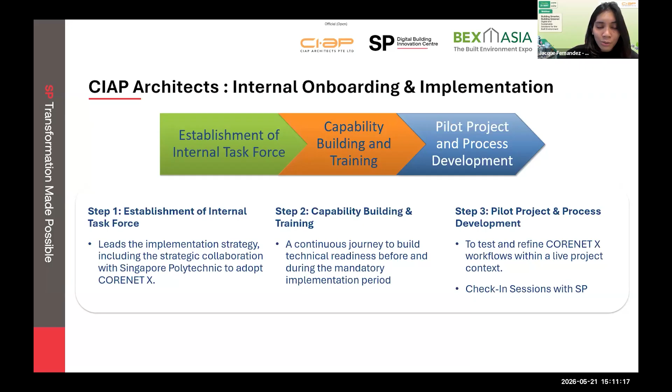We continue to work closely with SP throughout stage 1 to 3, and I'll be sharing more about this in the next slide. Together with SP, our first step was to understand the start-to-end project workflow under CORENET X.

So we mapped out how information flows between the architects and the technical team, as well as the authorities, and the impact CORENET X has on our project lifecycle. The alignment was crucial because collaboration is truly the key driving factor for CORENET X.

To date, CIAP has three ongoing projects under CORENET X now, each at their own milestones. One project is preparing for construction gateway. Another is preparing for design gateway, replying to our very first WD for that project. And lastly, we have one more project preparing for its first DG submission. All this occurred in the past, I would say, 8 months from the third quarter of 2025.

The second step focused on digitalization upskilling, starting with RABW training. Here we learned the new CORENET X submission requirements, clarified the roles of architects versus BIM specialists, and also practiced using submission checklists for the different gateways involved. This stage gave our staff the confidence to understand not just what to submit, but how to structure our submissions correctly at each gateway. This is one of our trainings at SP itself.

Our whole office went down to understand the RABW together.

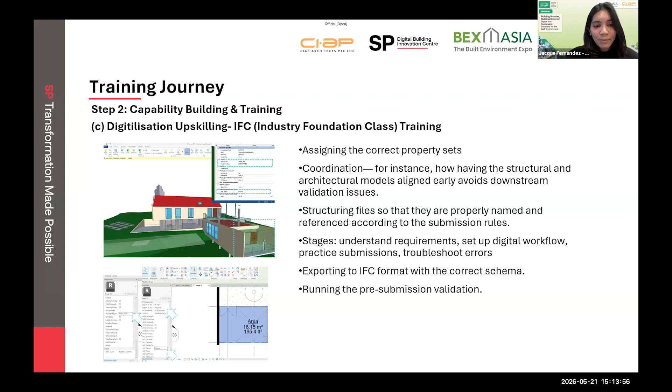Lastly, we finally applied it to a live pilot project. And from then on, that was where we truly went hands-on and developed our process. To date now, we have developed a CIAP internal CORENET X IFC SG guidebook.

This guidebook applies to all projects that require an IFC model submission under CORENET X, and it is also CIAP's internal working standard. It translates the external requirements into a practical internal workflow that we can follow consistently across projects, developed based on our training sessions in the past few months and, most importantly, our real experience from our live pilot project that has since been submitted already.

This guidebook is actually intended to cover the full end-to-end workflow from understanding the RABW all the way to submission, while ensuring IFC SG compliance. So on the screen is an example of the content page in our guidebook.

You'll see that the guidebook is structured into several key chapters. First, we start with an introduction, which explains the purpose, the scope, and how users should navigate through the guidebook, and how users have to link it back to the RABW or back to the IFC SG guidance.

Next, we move on to the IFC SG framework, where we cover fundamentals such as what is IFC, why is it required under CORENET X, and how IFC SG works in the context of submission requirements. I feel this content in the guidebook is crucial because, to an extent, everyone is also still trying to understand exactly what this IFC SG is and why it's relevant.

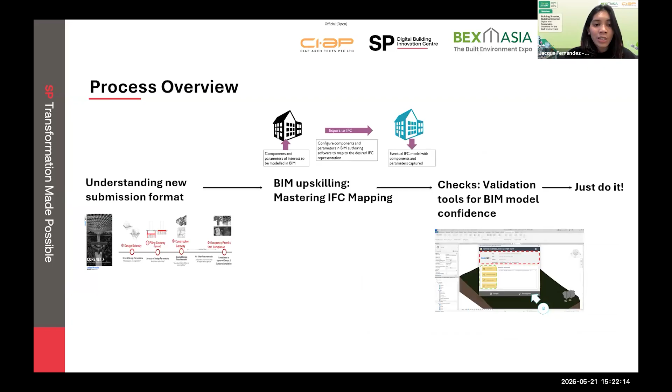Overall, the key message is that CORENET X is not just a compliance exercise. It requires a structured workflow, clear responsibilities, and strong internal standards to execute this effectively. For us, the training was more than just a learning system; it was about transforming our mindset from drawing-based submissions to data-driven submissions. The step-by-step structure of the SP program, from understanding the regulations to mastering IFC plus SG standards and then walking through the entire workflow, made the transition manageable and achievable, even for a medium firm size like ours.

Finally, I'd like to share a few reflections from CIAP's CORENET X journey. Our first key lesson is to involve the whole team from the start. CORENET X is not just a BIM or technical initiative; it affects everyone—architects, technical staff, management, and even your administrative teams. Everyone will play a role, and the transition is much smoother when the entire office understands the bigger picture and is part of the journey.

Second is to adapt digitalization progressively. The shift to CORENET X can seem overwhelming at first, but when broken down into manageable steps—understanding the new submission process, learning IFC mapping, and mastering the validation tools—it becomes much more approachable. Leverage the tools the industry is developing, and they will continue to develop these tools because we will only continue to advance from here. So what I would suggest is continue to expose yourself to all the third-party extensions that are currently being, I would say, competitively developed right now.

Lastly, set up your standards, stress test your workflows, and train your teams. By the time CORENET X becomes mandatory for all projects, you will have the systems, the knowledge, and confidence in place. Yeah, that's all. Thank you.

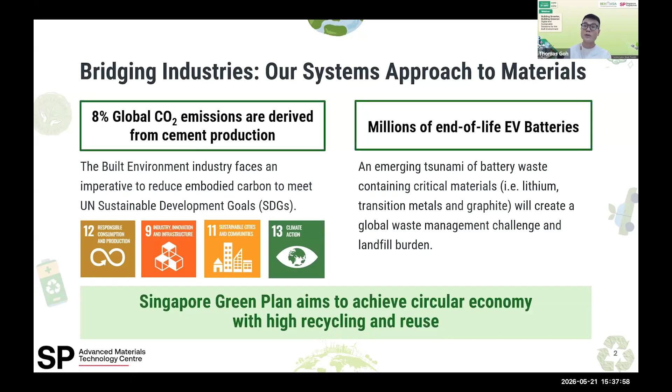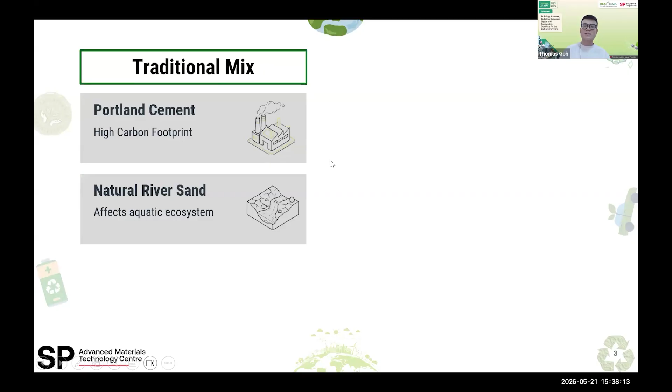So what is the innovation that SPAMTC is providing here? In traditional concrete mix, you have Portland cement, which has a high carbon footprint, as well as the use of natural river sand, which is commonly used today. For our SP sustainable mix, we are using two different types of supplementary cementitious material, which are materials that can partially replace cement.

One is GGBS, an established byproduct from steel production. Secondly is the spent graphite. Spent graphite is our main focus here because it is the innovative and upcoming waste material that will be coming in large volume in the upcoming years.

If you ask how much graphite you can obtain from the battery, depending on the battery manufacturer, the amount of graphite can account for about 12% to 21 weight percent per vehicle of the electric vehicle battery. This graphite is used in electric vehicles in the battery because of its high electrical conductivity in conducting electrons to make the battery work efficiently.

So when you actually put the spent graphite into concrete, we are expecting that this concrete can open the doors for energy efficient, smart infrastructure, as well as smart building applications.

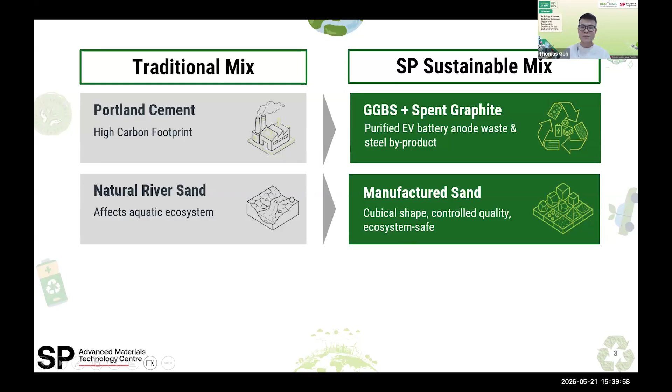Secondly, we are also partially or fully replacing river sand with manufactured sand. This manufactured sand comes from granite quarries, and because it is manufactured, you can control the size to be cubical. Because they are all more or less controlled under a tight stringent condition, this manufactured sand gives the concrete more consistent workability as well as consistency.

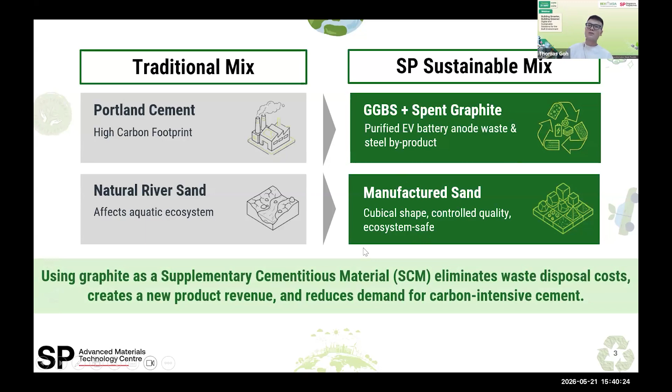So we want to promote the use of graphite as one of the SCMs to eliminate the waste disposal cost for the waste recycler. We also create new product revenue for this waste recycler and reduce the demand for carbon intensive cement. So we're killing three birds with one stone.

Under this zero waste system, how it works is that first, from the battery supplier's point of view, there will be an extensive extraction and purification of the battery. This is to decommission the battery to prevent battery explosion. They have to treat it first, fully discharging the battery, for example in a concentrated salt solution, to prevent explosion.

Then after that, they dismantle it, then separate the respective metal and plastic components. Subsequently, they extract the lithium, the heavy metals, and lastly the graphite. Usually the graphite carbon and the heavy metal will come together as what we call black mass.

From there, you go through further purification, step number two, which tries to separate the metals from the respective compound. The reason is that battery manufacturers want to sell the material back to the raw material supplier, so they want to separate the lithium to sell as lithium, or sell the iron, nickel, cobalt, and not forgetting the graphite. Graphite for them is probably the least important because of its lower value compared to the other metals.

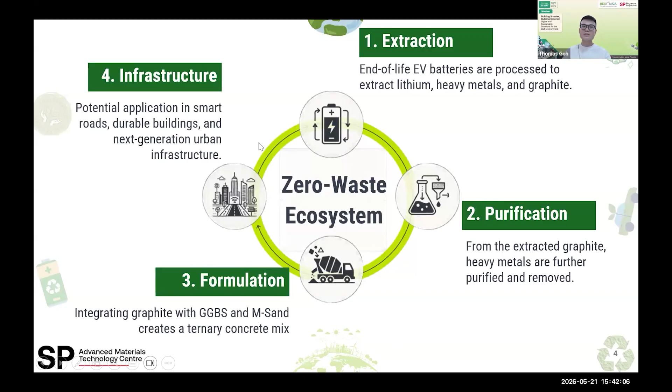Then thirdly, after we separate the respective elements, we can formulate this graphite in combination with GGBS and our manufactured sand to create a ternary concrete mix. With this optimized formulation, it has the potential to be used in smart roads, durable buildings, and the next generation of urban infrastructure.

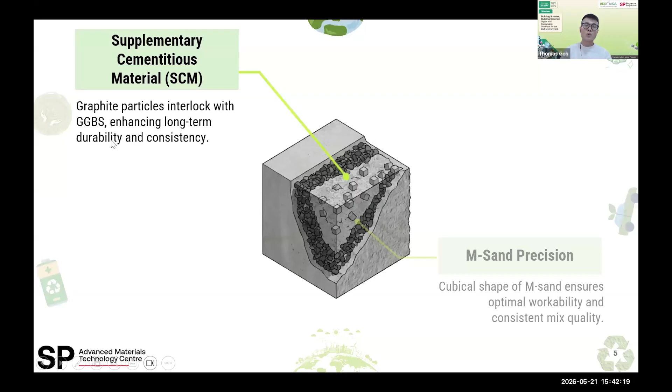To give you a graphical point of view, you can see that in this concrete mix there are two kinds of SCM, which are the graphite particles and the GGBS. With the interlocking of these particles together with the cement binder, you can create a more durable and more consistent concrete mix.

Secondly, with the incorporation of graphite, you actually improve the electrical conductivity of the concrete. This can serve as the value added for smart infrastructure or sensor integrated roads. But this has to be optimized with the percentage of graphite incorporated into the concrete. The more graphite inside the concrete, the more conductivity will be performed.

Then the third one is M-sand. With the cubical shape of the manufactured sand, you actually improve the workability and have a more consistent mix. With these three different sustainable raw materials in mind, you create a lower embodied carbon concrete.

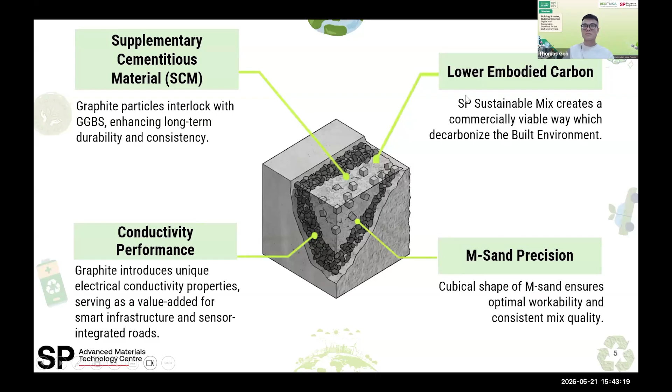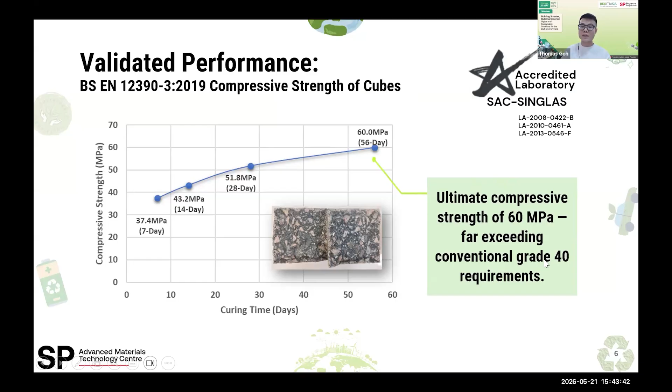Now we'll talk about the performance, because performance is the most important metric for the industry. Following the BS standards, we can achieve an ultimate strength of 60 megapascal, which is far greater than the grade 40 concrete requirement. This enhances the suitability for structural concrete application.

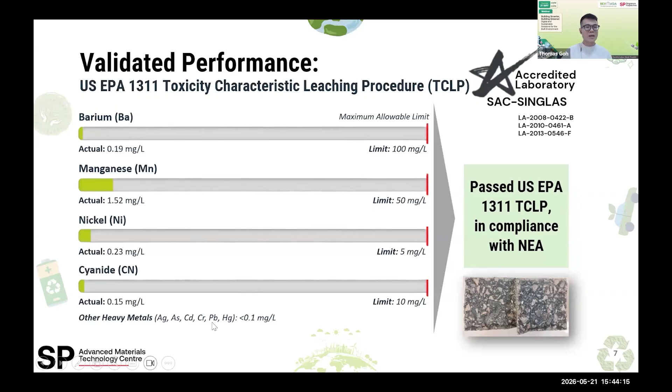We also sent our concrete to a third party accredited laboratory to measure the toxicity test in compliance with the NEA standards, which is the US EPA 1311. Our concrete passed all the performance tests with a very negligible amount of heavy metal. Not shown in this picture, it also passed, for example, silver, cadmium, chromium, and also phenolic compounds, cyanide, and fluoride.

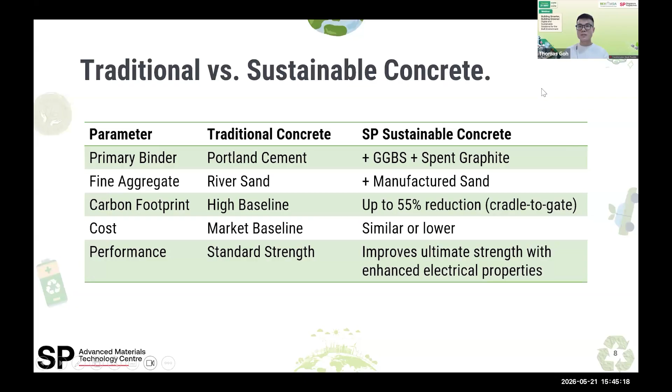As for the cost, we put here similar or lower, because at this moment we are not sure how the battery recyclers are going to price their spent graphite, but we are quite sure that GGBS is also slightly cheaper than OPC cement. For the last performance point, we also achieve the ultimate strength of 60 megapascal with enhanced electrical property. So our value proposition here is that not only can we achieve a carbon dioxide reduction of up to 55%, we also enhance the electrical conductivity of the concrete.

The last part is that we also provide customizable mixes under Singapore Polytechnic. We know that this concrete mix is not a one size fits all, so we actually cater to the company's demand for whatever kind of workability, carbon target, budgeting, or conductivity performance, tailoring to the specific need for the required concrete product.

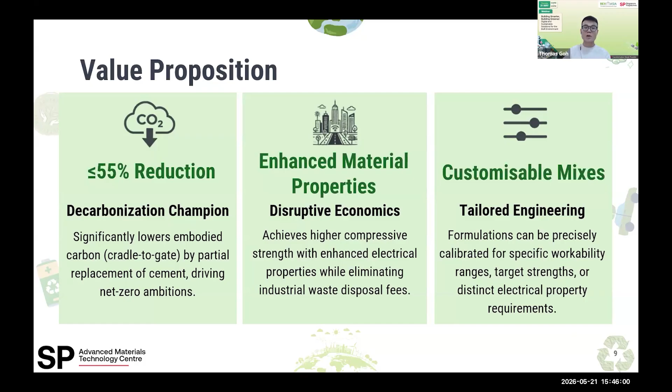In terms of real world possibility, at this moment our technology has a TRL level of 5 after passing the third-party accredited laboratory test under real-life conditions. The main immediate use here, I would say, is durable construction, because Singapore's climate and heavy traffic require material that can resist environmental stresses. We try to incorporate a combination of GGBS as well as spent graphite to create such an innovative and durable concrete.

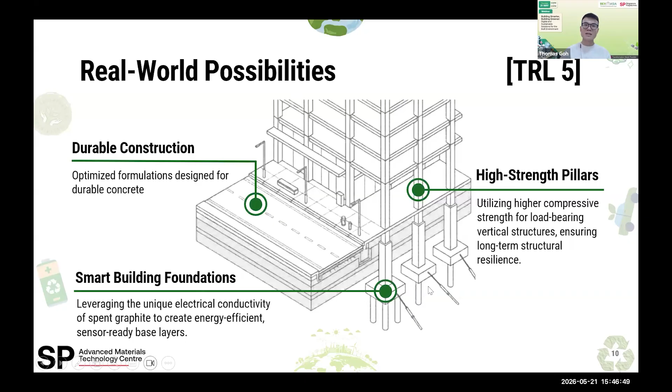We also want to leverage the unique electrical conductivity of the graphite to create an energy efficient and even sensor-ready base layer. It could be below the building or even below the roads.

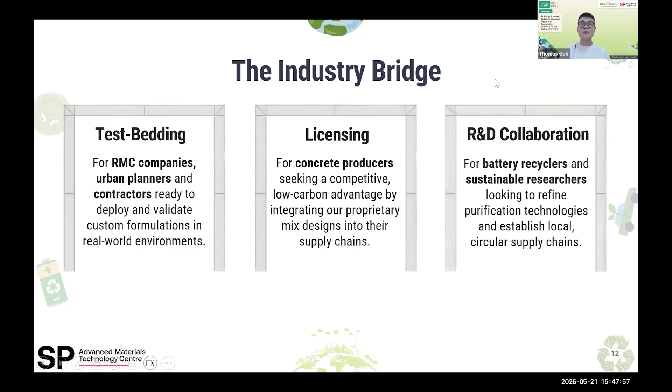To suit the suitability of the desired material property. So this technology has been proven, and the environmental imperative is clear.

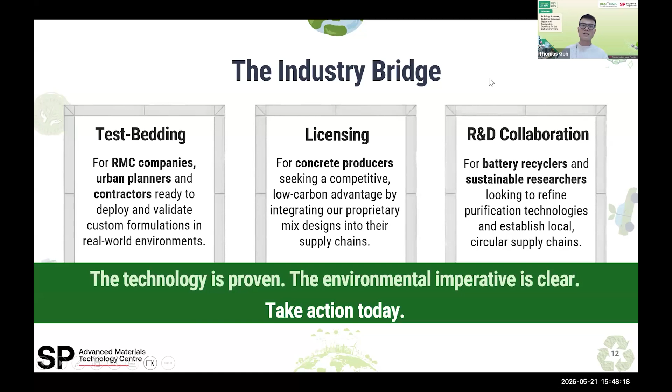We hope that most people here can take action today. Whether you are a ready-mix concrete company, a government agency, a contractor, a battery recycler, or even a researcher, we welcome all kinds of collaboration and invitation. So this is my last slide, and thank you very much.

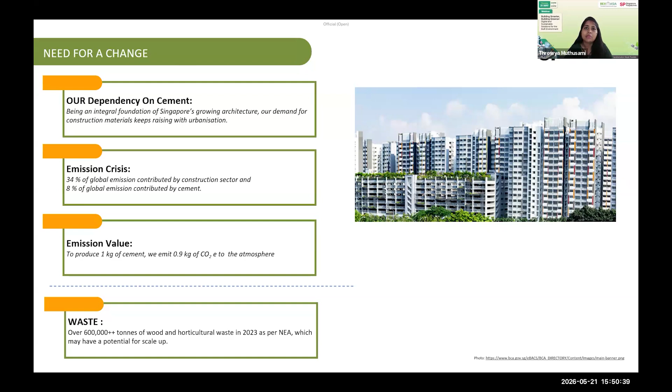But very importantly, what we see is there is a need for a mindset shift. We need to ensure we have a material-level mindset shift, because that is the core foundation of all the buildings you see around us. When we do that right, we will end up carbon negative as we go on, because the foundation has to be right. And that's what at SP we would like to address.

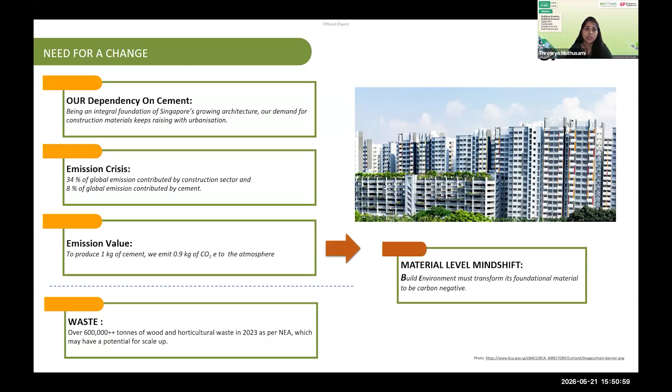At SP, we've always tried to use sustainable materials, and recycled materials. Now we're going beyond, to see if we can use carbon negative materials, which can help us reduce emission values—not just by number, but actually contributing as negative materials to further reduce the contribution coming from other materials used initially. Biochar, through its pyrolysis process, has this potential of doing what other materials can't: carbon sequestration throughout its life cycle.

We talked to a lot of local suppliers, and one local biochar supplier we contacted had three distinct sources of biochar. We tried to address and study them to see if they're usable directly: rice husk, wood waste, and plastic waste.

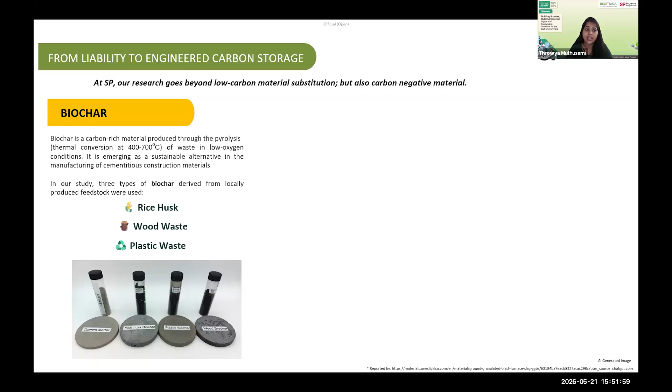In general, what is usually done for mortars is that it has cement content, and no doubt a very high carbon emission number. Traditionally, we look at SCMs to reduce the amount of cement used, because these SCMs have a much lower carbon emitting number. Now we're going beyond that—can we use materials that contribute much less than just SCMs? Can we use biochar? Because biochar, especially from biomass sources, has sequestration potential, making it a carbon negative material for use.

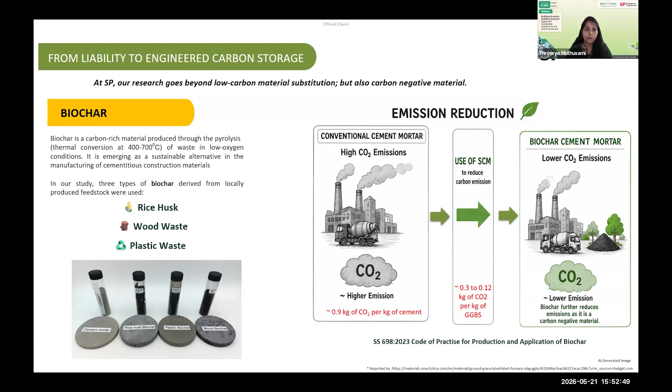And that helps a lot with other Singapore goals that have been set in the market, completely in line with Singapore's 2030 vision, where we need to reduce waste going to landfill by 30%, and that's something we really need to work out.

In addition, there is a long-term plan for Singapore to achieve a zero waste vision. That's a complete long-term plan because every step we take in this direction counts, as zero waste is a dream that we aim to achieve.

Singapore's Green Building Master Plan 2030, not far away from where we are speaking today, is what we need to achieve. There are three distinct sectors of 80-80-80. One clear sector is that 80% of the building's gross floor area has to incorporate green or sustainable materials, and that's going to be a mandate for them to achieve.

Not everybody is working towards biochar, but there is no doubt that biochar is helping in a lot of other things happening around. There are initiatives coming from Europe, the US, and the Asia Pacific market is not far behind—everybody's working on that. Completely in line with these adaptations happening across the globe, Singapore has

also come up with its own code of practice, for helping industries envision how biochar can be incorporated. What is currently used is in the agriculture sector—can that also be incorporated into the construction sector? The construction sector seems to be the one trying to absorb a lot more than what it's actually contributing, but that's what the COP is all about. It gives a detailed explanation of how things can be incorporated and what the requirements are.

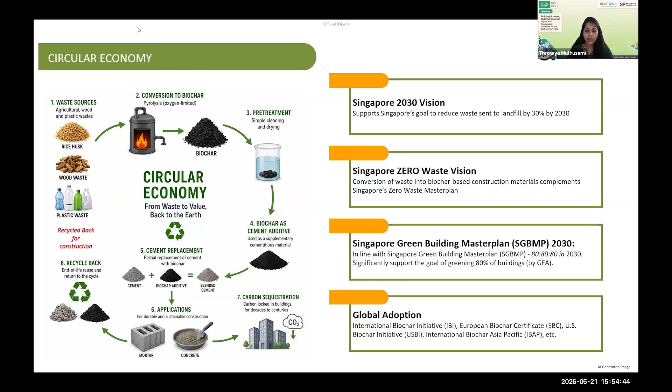At SP, when we did this study, our idea was to speak to suppliers and get their raw biochar sources, and understand if the biochar sources in the market today, which are being sold, are directly usable—meaning once it comes out of the pyrolysis process, can we directly use them in the applications for the building sector that we want to reduce emissions in. What we found out was there is a need for a pre-treatment, because in itself they are not directly usable in the form we intend to use,

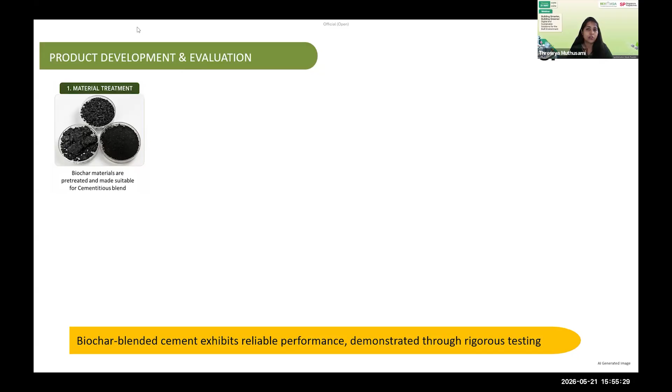especially if you're looking at cementitious material replacement—there is a need for pre-treatment. So what we did is the required pre-treatment, keeping in mind that we do not want to add more emission numbers during this pre-treatment process. That is vital—the idea is that the ultimate product has to be greener and sustainable. It can't have a pre-treatment or any process that adds to the numbers, undoing whatever good the biochar is doing in itself.

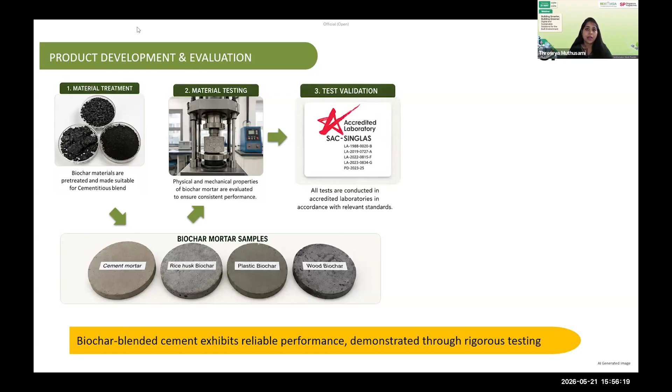With that, we ensure that when the construction sector wants to adapt these, there is a need for material testing. So we did all the required material testing for this to be used as a material additive, and also sent these to third-party laboratories to ensure the values are not just from what we did in our own lab, but also accredited by third-party laboratories, verifying these results to ensure they are usable immediately by anyone who's interested in it too.

We have seen that basic, essential properties like setting time, soundness, consistency, and chemical composition have all met the required standard limitations. Loss on ignition was something brought up when we gave the study, because especially materials like biochar, which usually come after a pyrolysis or low-temperature burning process, there's sometimes potential that there are still components with ignition properties. So a test had to be done on this—that was also conducted, and we optimized the property mixes to ensure these values are in line with what the building environment sector needs and requires.

Strength is something we all love to see—does this help improve strength? Yes, it did to a certain extent, but it completely depends on the type of biochar you're trying to incorporate, the application where you intend to use it, and the composition mix that works best for your application. There is improvement, but it depends on the application of use—so you don't have to rely on cement alone. We also try to do rigorous testing to make sure other materials with potential could be used as replacers.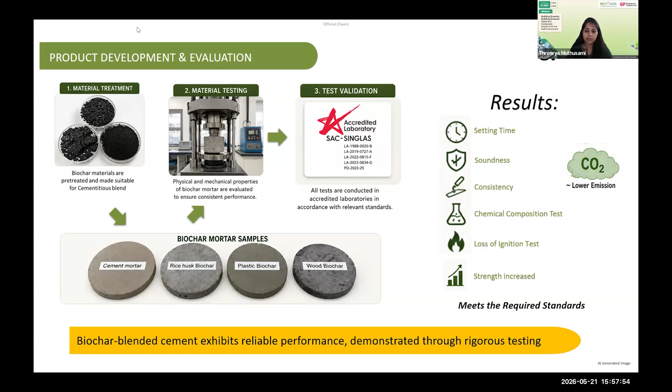One concern we have experienced from the industry is environmental concerns. No matter how much we want to use these waste materials, there is always concern about toxicity characteristic testing, the leaching properties—especially in Singapore, when we are trying to collect much of our rainwater. We do not want these buildings, which cover most of our spaces here, to have any components that could leach out and affect our drinking water. Keeping that in mind, we did a complete study on leaching analysis for all three different types of biochar, and also in combination, and they seem to be doing quite fairly well in terms of safety standards. They are much lower in value, meaning they are completely safe for use based on the tests we conducted in the laboratory.

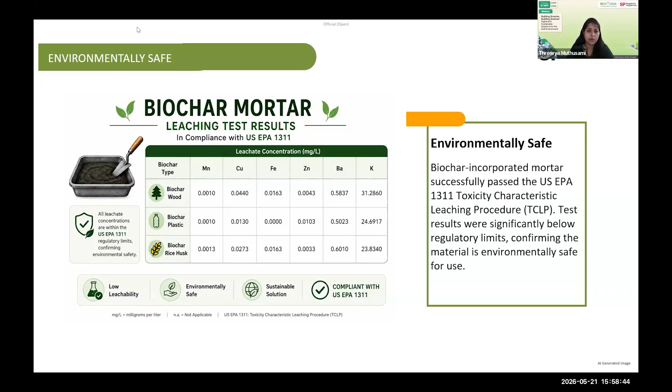What's interesting about biochar is that it doesn't really require advanced technologies or equipment in your current operations, whether you're concrete suppliers, mortar producers, precasters, or premixed mortar manufacturers. It has applications widely usable across the industry, because wherever cement is used, this material can adapt itself with a little tweaking to achieve the performance you need, offering complete versatile adaptability without much new incorporation into your operational space. That's a complete add-on to what we can already do.

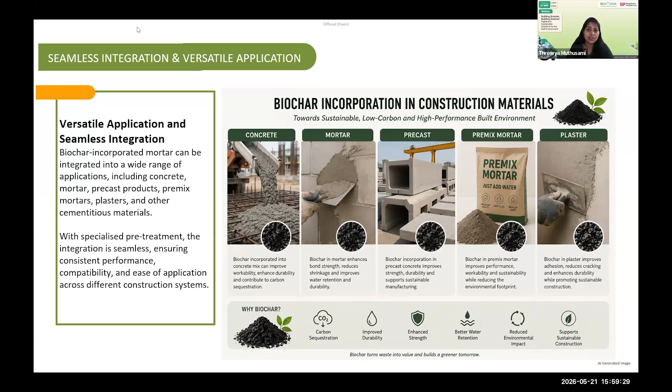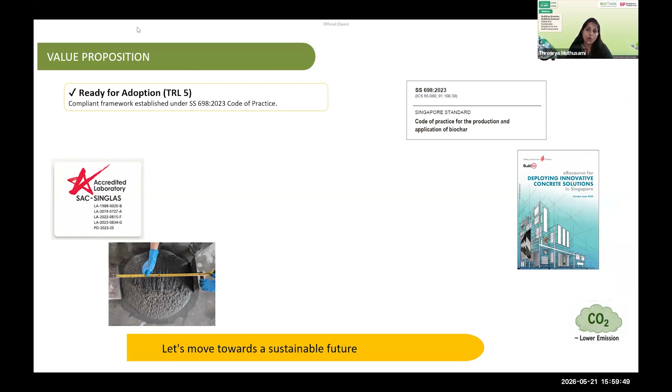There's also a value proposition in having a TRL5, since the Code of Practice in Singapore already states its usage and gives a complete technical guideline on how it can be used, not just for agriculture, which is currently in place, but also for the construction sector and water purification sectors. The use of biochar is already in the code of practice.

Additionally, in June of last year, BCA released an e-resource. If you're interested in knowing how to incorporate biochar and what tests are needed for industry adoption, there's a clear guideline, including a flow chart BCA put together with a lot of industry input, showing the steps needed for any new adopting technology to go to market and be tested. Biochar was one of the case studies taken in and given a complete detailed analysis on how you can adopt it. Please do have a look into that.

All our tests, and whatever additional tests we've done, have completely passed accredited testing. We've verified these values, so it's completely safe for you to go ahead and use them. Environmental safety and leaching standards have also been taken care of, so you don't have to worry about NEA or PUB requirements for using this material in your building constructions.

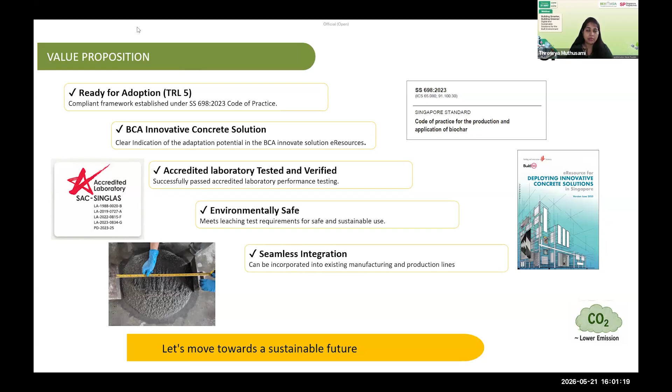What we've seen is that the material can be seamlessly integrated into any adaptation without advanced equipment, new technologies, or new machinery in your pipeline, because much of this is very similar to cementitious use, and the industry's existing silos can be used to add it in.

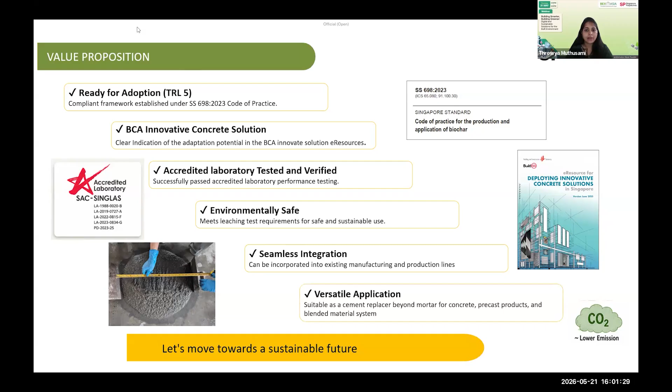With that, we'd like to say we're open to working with anyone who wants to license this product directly with us, or any new product developers, like ready-mix concrete suppliers, producers, or blended cement manufacturers interested in how this can be modified further, or contractors who have test-bedding locations where we can try them out in real-life applications. We'll be happy to do that.

Last but not least, to recyclers - not just for biochars, but for these three different types we've studied - we're also open to studying biochar properties across other biochar sources and incoming sources, to see what proportion works best for them and how they can add value to an industry like this.

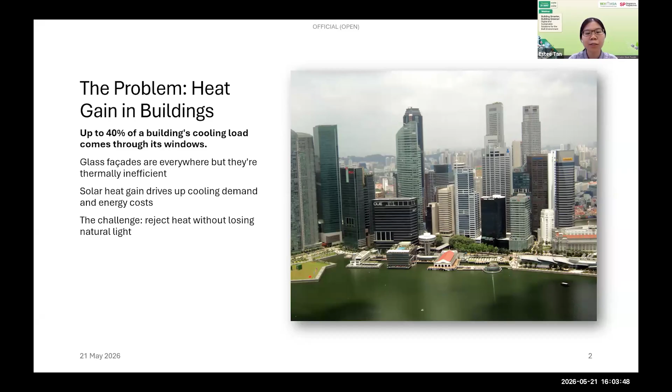Solar heat gain drives up cooling demand and energy costs significantly. The challenge is to block out the heat without losing the natural light that makes glass facades desirable in the first place. So how does our solar heat rejection coating work?

Sunlight is made up of visible light, what we see, and infrared radiation, what we feel as heat. The coating is engineered to let visible light through while blocking infrared before it enters the building. It is spray applied at just 40 to 50 microns thin, and it blocks 99.8% of infrared radiation, while still allowing 46% of natural light to pass through.

So it's just a filter for heat. The light gets in, but most of the heat stays out. Overall, the total solar energy rejection is 81%.

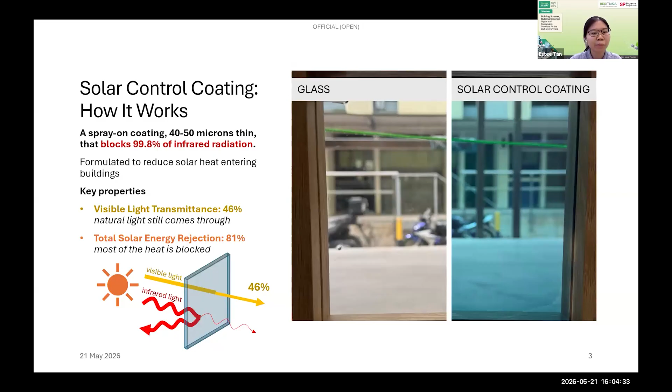These are third-party laboratory testing results, tested to ISO 9050 standards. We have also included a benchmark comparison against a market-available window film. First, just to note why we are comparing these two products: the visible light transmittance is comparable, at 50% for the market film versus 46% for our coating. This means we are comparing two products that let in a similar amount of natural light.

Now let's look at the solar heat gain coefficient, or SHGC for short. Imagine standing behind a window on a sunny day. Some of that solar heat is reflected by the glass, some passes straight through, and some gets absorbed by the glass and is re-radiated. SHGC measures how much of that total heat actually ends up inside your building. So the lower the number, the better the coating is at keeping heat out.

The market film brings the SHGC down from 0.89 to 0.44, but the solar control coating goes even further, to 0.39. This means that at a comparable level of visible light transmittance, our solar control coating delivers better heat rejection.

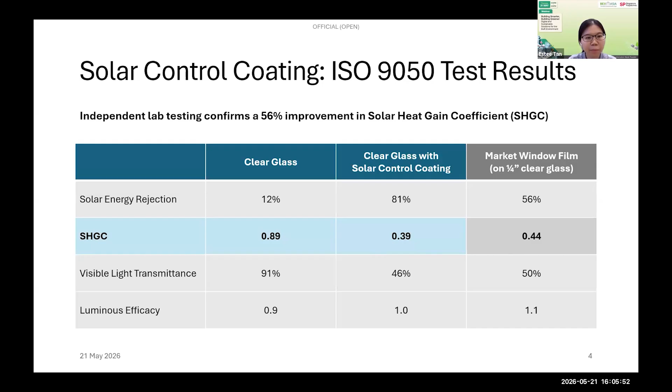Laboratory results are important, but we have also validated the coating under actual Singapore weather conditions at BCA Skylab. The setup was two identical side-by-side rooms: same temperature set point, same lighting, and the same simulated occupants. Both rooms face west, meaning they took on the full force of the afternoon sun.

The only difference was the glazing. One room had the solar control coating applied, and one did not. Because the conditions were identical in every other way, any difference in performance between the two rooms can be attributed directly to the coating.

Now for the energy performance. Across the test period of 8 days, the coated glazing delivered an average daily cooling load saving of 8.85%. And when you look at total energy, which includes lighting, fans, plug loads, as well as cooling, the saving is 3.41%. This translates directly into lower utility bills and a lower carbon footprint for a building owner.

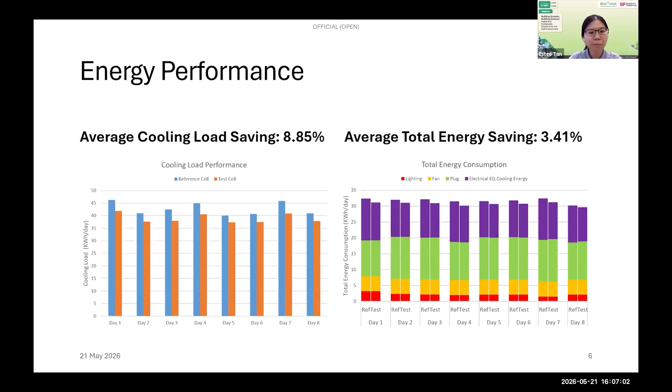Besides energy performance, occupant comfort is also important, and the solar control coating performs well here too. On thermal comfort, it was measured using an internationally recognized scale called the Predicted Mean Vote, or PMV. A score of 0 means people feel perfectly comfortable, and the further you move from 0 in either direction, the more uncomfortable people feel. The accepted range for good thermal comfort is between negative 0.5 and 0.5. The coated room stayed within the comfortable range 98.1% of the time.

On visual comfort, the coating delivered a 33% improvement in imperceptible glare. This means that 87% of the time, glare in the coated room was at an imperceptible level, compared to just 54% in the reference room. Occupants can keep their blinds open and still work comfortably.

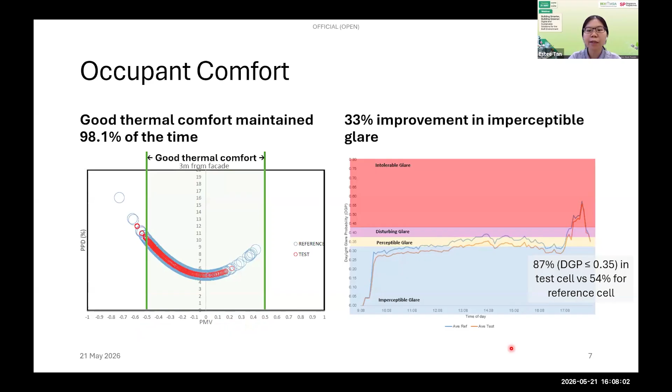Beyond glare, we also look at the quality of the light passing through the coated glass. The first metric is daylight quality: whether the combination of light levels and color temperature feels pleasant to the people inside. We assess this using the Kruithof curve, which maps out the characteristics of light that humans find visually comfortable. The light passing through the coated glass falls within the pleasing range.

The second metric is the color rendering index, or CRI for short. In simple terms, CRI measures how accurately a light source reveals the true colors of objects compared to natural daylight. For building owners, a practical way to think about it is this: if you apply this coating to your windows, how will it affect the way colors look inside your building?

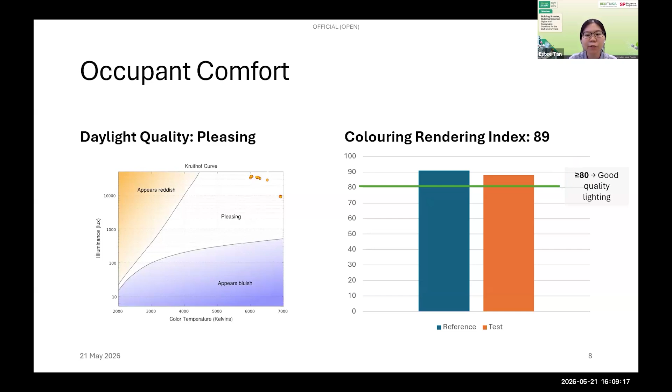A CRI above 80 is considered good quality lighting, and our coating had a CRI of 89. This means occupants will still perceive colors accurately and naturally. The coating doesn't cast a tint or distort the indoor environment. In short, the coating reduces heat and glare without compromising the quality of the indoor visual environment.

In summary, the coating delivered positive results across energy, thermal comfort, and light quality. On energy, the coating delivered a cooling load reduction of 8.85% and total energy saving of 3.41%, both measured under real-world conditions at BCA Skylab.

On visual comfort, daylight glare probability results showed a 33% improvement in imperceptible glare, meaning occupants are far less likely to experience disruptive glare from the afternoon sun. And on light quality, the color rendering index came in at 89, well within the good range, and comparable to what you get through uncoated window glass.

So taken together, this is a coating that reduces heat and glare while preserving a high-quality indoor environment.

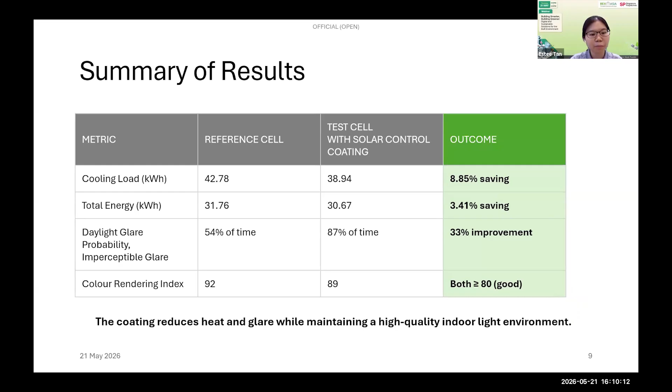So you may wonder how this compares to conventional solar films. The key difference comes down to how the coating bonds to the glass. Conventional films rely on adhesive, which tends to peel or delaminate over time along the edges, especially when moisture gets in during routine window cleaning. Our coating forms a continuous layer bonded to the glass surface, eliminating those failure points and reducing maintenance requirements.

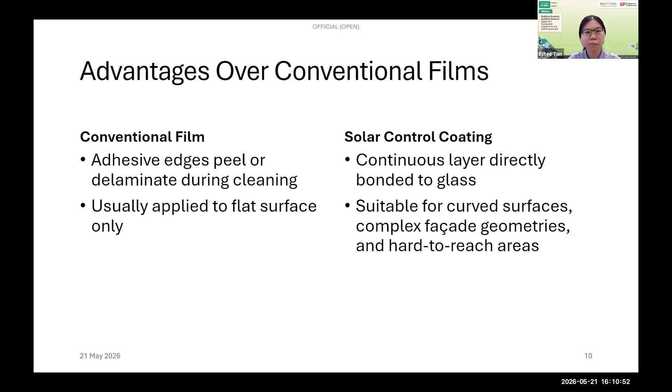And because it's spray applied, it can go onto curved surfaces and complex facade geometries where conventional films cannot be used. Finally, the spray-on application makes this a practical, low-disruption retrofit option for existing buildings, for cooling energy savings and glare reduction without replacing a single pane of glass in your building. For building owners working towards Green Mark certification, the coating is worth considering as part of your energy efficiency strategy.

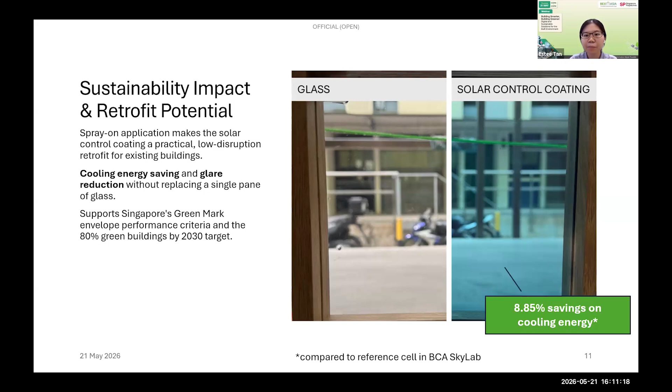So if today's results have piqued your interest, here's how you can take this further. For companies who want to see the coating perform on their own building before committing, we can work together on a trial run, a chance to validate the performance of the coating in your specific context with your own glazing system under your real operating conditions.

And for those who are ready to take it further, the technology is available for commercialization through Singapore Polytechnic. Whether you're a glazing contractor, a building products company, or a sustainability solutions provider, we'd love to share more about the technology and explore collaboration opportunities. If either of those pathways sounds interesting, please do reach out to us. Thank you very much for your time today.